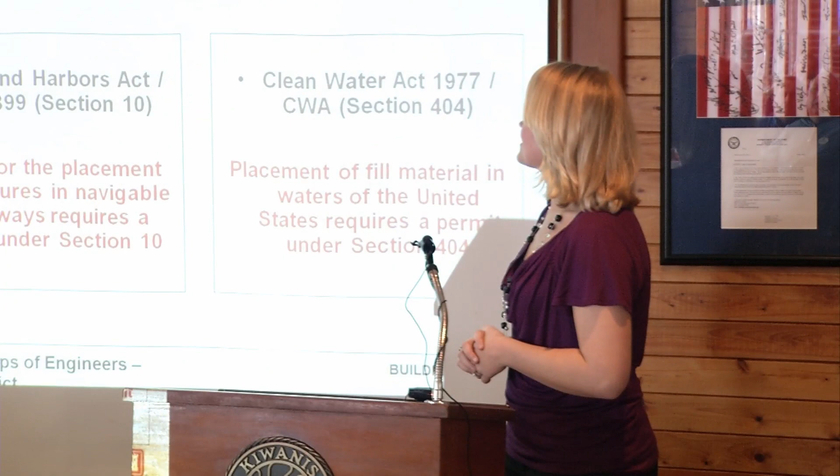Today we're just going to kind of talk about what we do with the Corps of Engineers in the regulatory department, how we do things, why we do them, where we get our jurisdiction from.

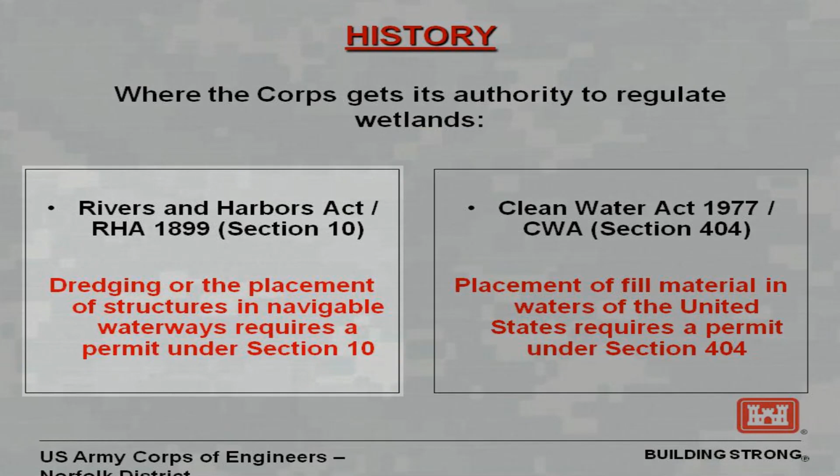As Charlene said, in 1899 the Rivers and Harbors Act was enacted. That gave us the authority to manage navigable waters. Typically that's all waterways that have tidal influence. You have the ebb and flow of the tide, and that all comes back to commerce because, as everybody knows, everything runs around money. So we want to make sure that all the ships and everything can get where they need to go.

Then, later in the 1970s, we had the Clean Water Act come around. That gave us more authority to extend past the tidal influence of waterways to other water bodies that affect navigable waters and commerce later on down the stream.

So navigable waters, as I said before, are those waterways that are subject to the ebb and flow of the tide. That is true for the majority of the cases. There are a few exceptions to navigable waters where we would also have jurisdiction. For example, an impounded area, there's a dam. Maybe at one time it was tidal, now it's not anymore, but we still have that authority because it does interact with interstate commerce. The Mississippi River, that's another example. As you get farther north, it's not tidal anymore, but it's still transporting goods between states.

Waters and wetlands that are Section 404, those are the waters and wetlands that are adjacent to navigable waters or that flow into them. So once you hit the high tide line, you may have a marsh and a wetland that's not daily flooded, but it's still a wetland area, or streams in the mountains, ponds that someone maybe has on their farm or in the woods by their house. Those all eventually flow into the rivers.

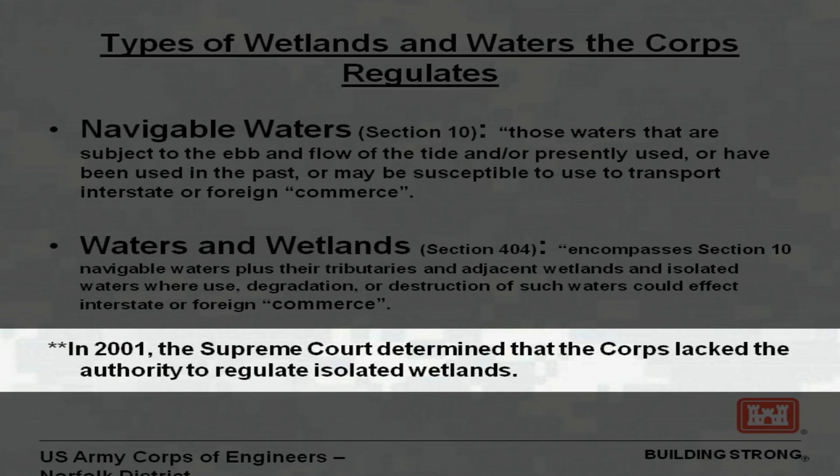One exception to our jurisdiction are isolated wetlands. Those are ones that have absolutely no interaction with navigable waters. So if you were to go into the middle of a field and dig a hole and it filled up with water, because it doesn't go anywhere, that would not be within our jurisdiction.

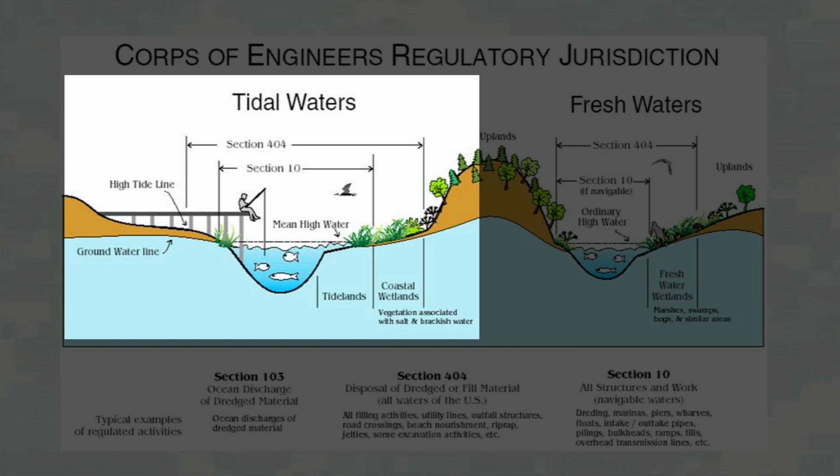This is kind of an example of showing you how our jurisdiction can change. You have a tidal system here and a non-tidal area. The Section 10 jurisdiction goes up to the high tide line or the ordinary high water line. And then the Section 404 is all the wetlands beyond those.

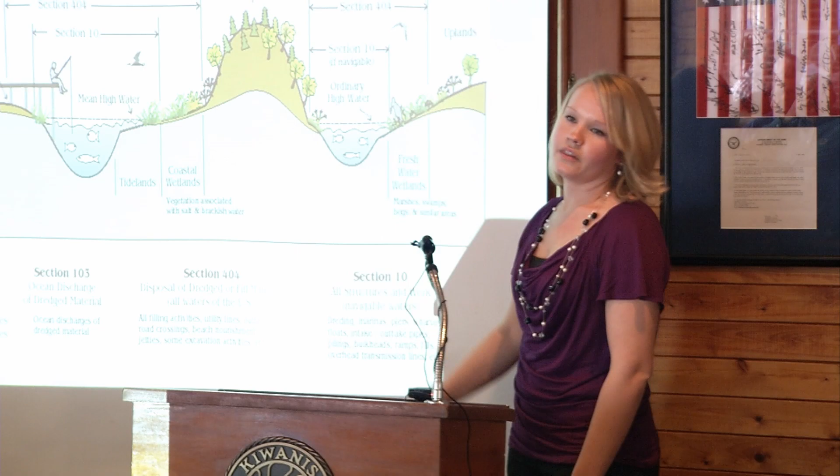Okay, these are some examples of different permits that we would issue to someone that wants to build something within one of our jurisdictions. Under Section 10 for navigable waters, we typically issue permits for structures that might impact navigation. So if someone wants to put a pier in, you'd want to make sure that the boats aren't running into them. Same thing with dredging, you want to make sure that the boats can get in and out efficiently.

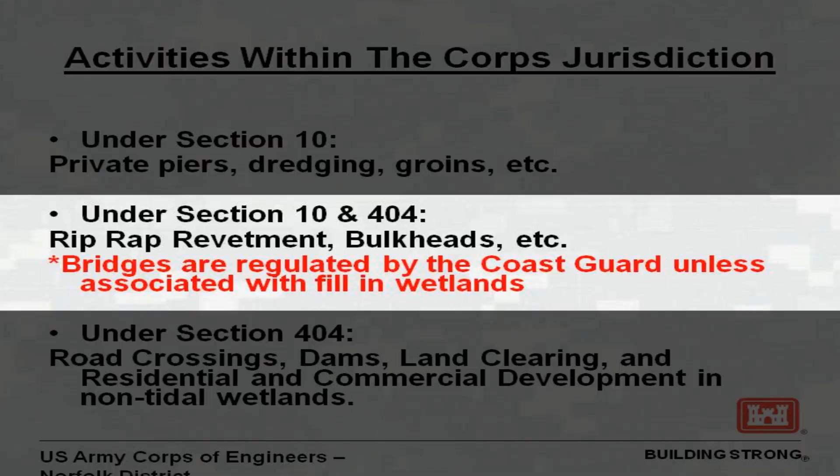Section 10 and 404, that's also for within our tidal areas, but it has to do with fill material, not structures being built. So riprap, that's when someone wants to take quarry stone rocks and put them along the shoreline to stabilize it, bulkheads, things like that. We would get jurisdiction under 404 and 10.

Bridges are the one exception to that. The Coast Guard has authority to issue permits for all bridges unless there is a fill component with it. So if they have to come in and put some riprap or some extra dirt along the footers or on the sides of the bridge, then we would also get involved.

And then lastly is our Section 404 only. That's for everything above the tidal and navigable water systems. So common developments, residential housing, commercial buildings, road crossings, we have jurisdiction to issue permits under 404.

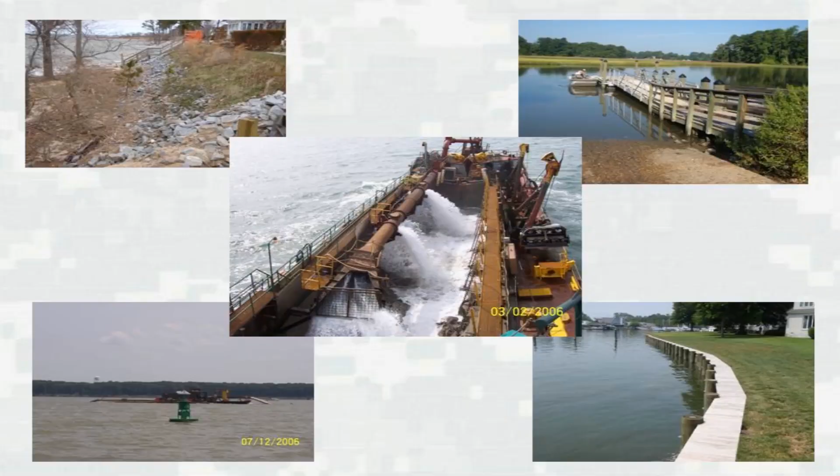Here's a few examples of Section 10 and Section 404 projects. You have our piers, that would be a structure, the riprap. This is one of the dredges that we have that dredges our federal channels. That was probably one of the neatest ships I've ever been on before.

What they do is when they're dredging the waterways, they create a slurry with all the sediment they're sucking up with the water. It dumps into the middle of the boat and the water all drains off. Then they go over to a disposal site and the entire boat splits in half and all the material falls out the bottom. So it's kind of scary the first time you're on there and you're thinking you're floating on water and there's a giant hole in the boat. Now, this is one you're probably a little more familiar with.

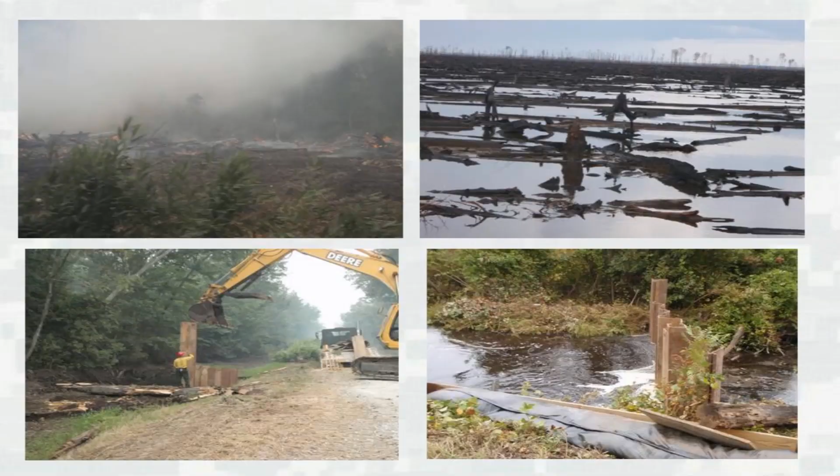This required permits under our Section 10 and 404 because we have the tidal wetlands out here, and then there were some non-tidal areas that had happened where the bulkhead had eroded away. And then here's an example of a 404 project.

Remember all that smoke you had to smell over the summer from the Dismal Swamp? That was one of my fun projects. I got to go out there during the heat of it all, and it was really interesting. But what we would regulate, because obviously Mother Nature, you can't control her, so we can't tell her what to do.

We work with Fish and Wildlife for all the techniques that they have to use to fight it. So when they have to come in and fill ditches and block them, that's all mechanical work that they're doing. So we have to make sure that once the fire's under control, everything is back to normal almost, then they have to make sure they restore whatever they intentionally impacted.

Alright, so when you think of a wetland, this is typically what you would probably think of. You look out here, that's kind of an obvious one. Some other examples, you have Virginia Beach, a swamp, a river system. But what about these? If you were to go walking through the woods and see something like this, would you typically think that's a wetland? All four of these are different types of wetland systems.

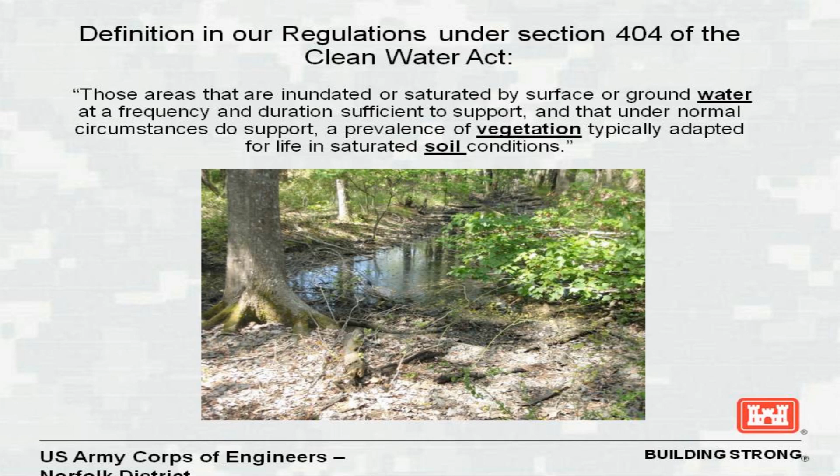And it's our job, which is the harder part, determining if it is a wetland, if it meets all the parameters, or if it doesn't. So the way we determine that is based off of 3 parameters dealing with water hydrology, the types of vegetation growing there, and the soil conditions.

So hydrophytic vegetation, we have to look at all the different plant species that are growing there. And if the majority of the plant species are likely to be wetland plants, or definitely wetland plants, then it falls into that hydrophytic vegetation category. If most of the plants typically grow in upland areas all the time, then it wouldn't meet that parameter.

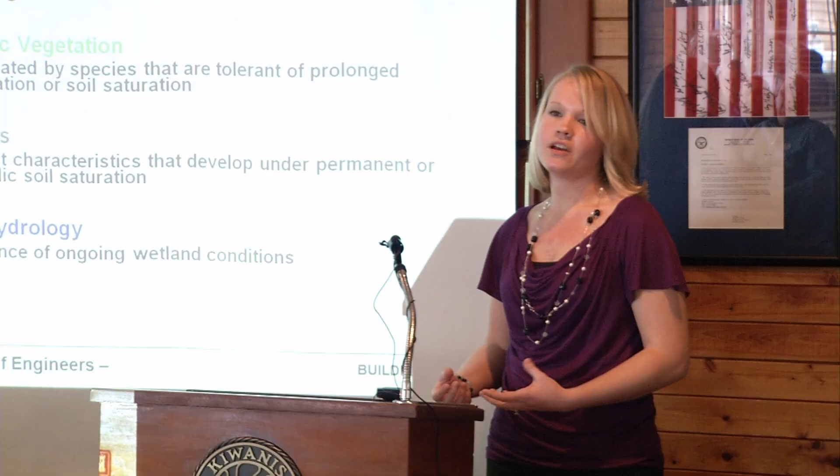Hydric soils. The soils change when they have water in them for a while. They tend to get darker, iron deposits in there start to bleed, and you get rust staining. Whereas if it's non-hydric, it tends to be a brighter color, kind of like clays when you go to the mountains versus the dark peat when you go to the swamps.

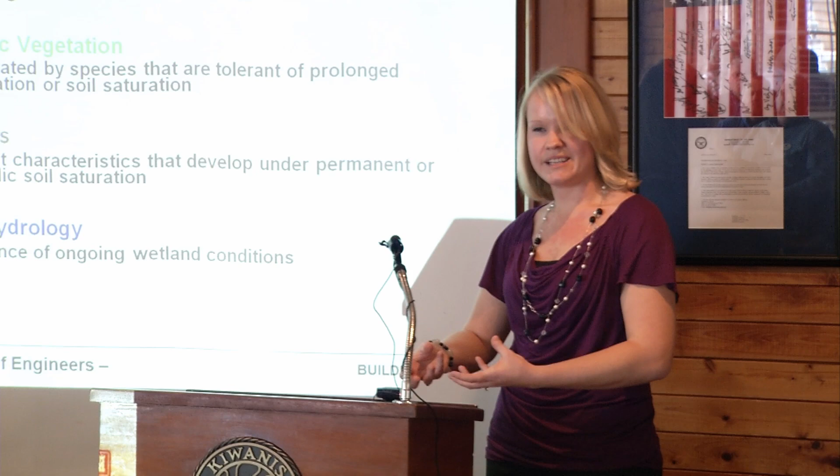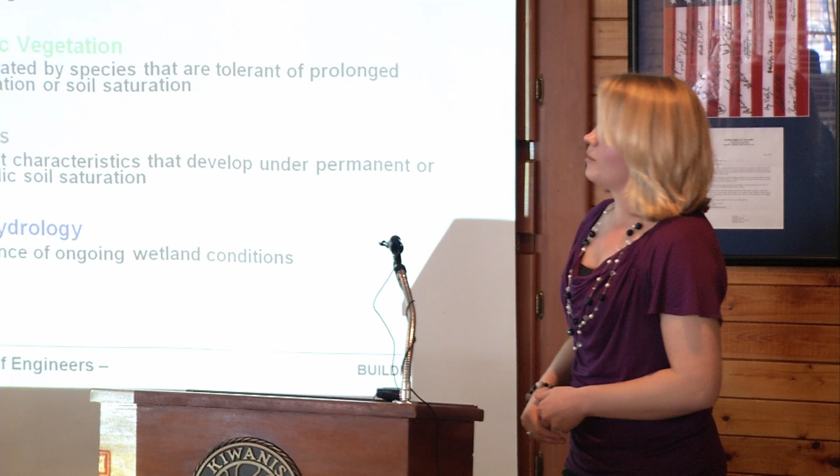And then hydrology, that can be the easy one sometimes. If you have standing water out there, you start getting water lines, the leaves turn black, or maybe the plants start growing different. If you look at a cypress swamp, the roots tend to grow out and buckle up more, but you wouldn't normally see that a lot in an upland area. So here's some examples of the wetland hydrology features. You have the water staining, the blackened leaves, the standing water.

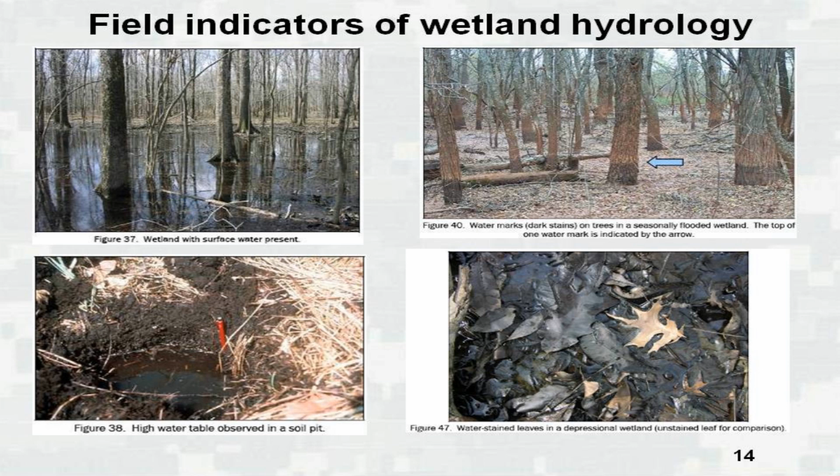Here's an example of the soils. As you can see, it starts here with the hydric soils where it's darker, and as it gets lighter, you get closer to an upland area. And we have a book that we use when we're in the field, so we have to dig holes, and we compare the soils to this chart. If the main background color falls into this category, most of the time it meets the hydric soil parameter.

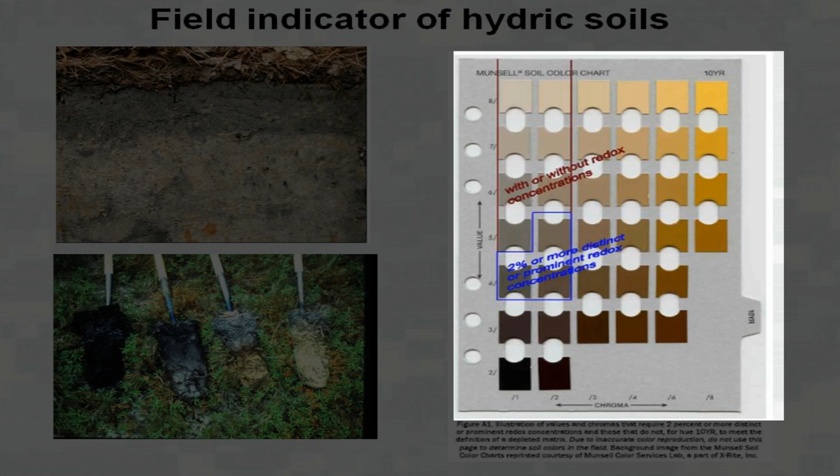And that can get kind of tricky in our area because there are a lot of low floodplain areas, swamps. So a lot of times the soils will tend to meet because you are near the ocean. And it gets a little easier as you get farther west because then it's closer to the water bodies, the streams, and the creeks. And then we have our vegetation.

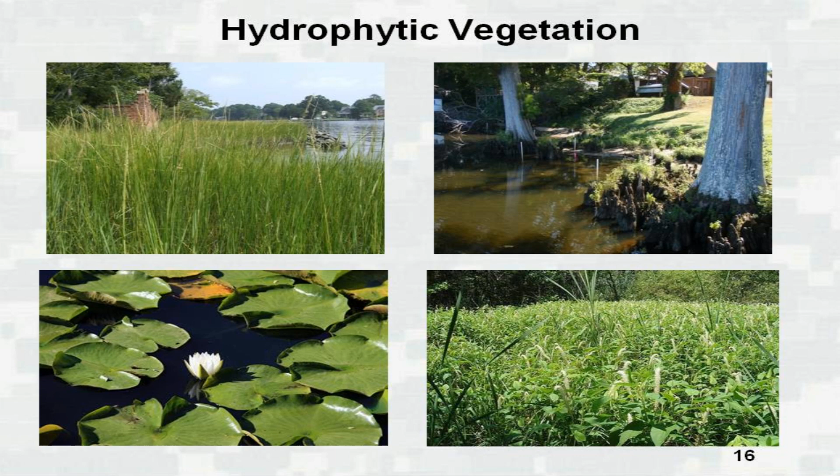You have the obvious ones like lily pads, cypress trees. And then it gets really tricky as you have to know hundreds and hundreds of plant species that even us, we end up scratching our heads and having to pull books out and key them out. So that's always fun. So basically that's what we do, how we do it. It's quick and simple. And does anyone have any questions?